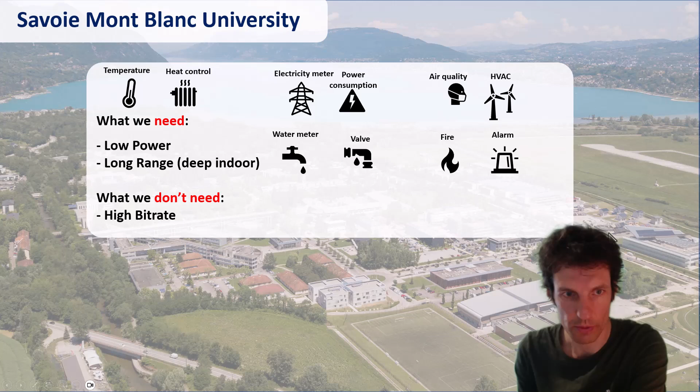And finally, there is one characteristic that you don't need at all, which is high bit rate, because you only send a few bytes every few minutes or so. And that is exactly what LPWAN is. LPWAN stands for low power wide area network. In this LPWAN category, there are 4 good protocols. They are not the only ones, but I'm going to mention only 4: 2 operated ones, LTE-M and NB-IoT, and 2 that work in the free band, which are LoRaWAN and Sigfox.

But don't get me wrong, I'm not here to say that LoRaWAN is the best, even if I'm going to speak about LoRaWAN today, because it only depends on the use case anyway. But what's nice with LoRaWAN is that you can build your own network, and you don't have to depend on anyone if you want to set up your private network. So if we want to do that, then we need to build a LoRaWAN network.

But before, we need to take action. Taking action can be summarized with this very obvious statement: we can control what we know. What does it mean? It means that the first action is to know. To know is actually putting sensors, like temperature sensors, air quality sensors, water sensors. And even by putting sensors, you can already save energy, because you can see all the aberrations and dysfunctions of a system.

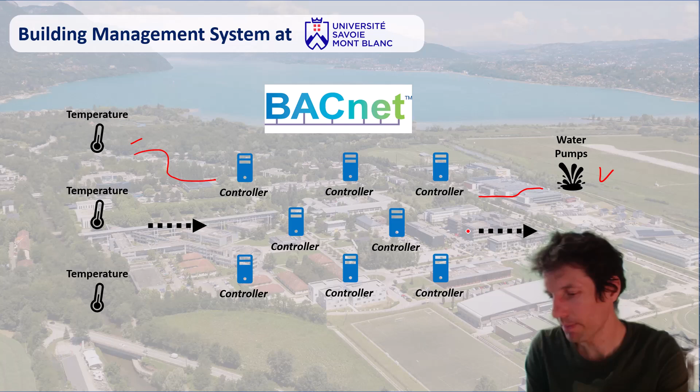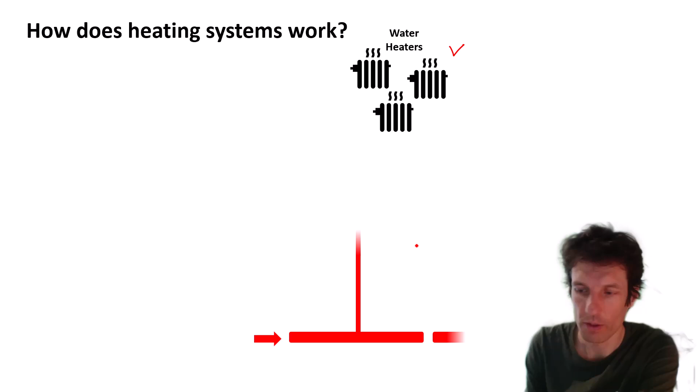And actually, if we want to improve this system, the first thing we have to do is to understand it very well, to see how we can improve it. So let's enter the technical room where all the pipes and the boiler are. At the university, we have hundreds of water heaters. How does it work? It's very easy. The hot water comes from the boiler, goes through the water heater, and the cold water goes back to the boiler. Very simple. And for the water to go through the water heater, we need a pump.

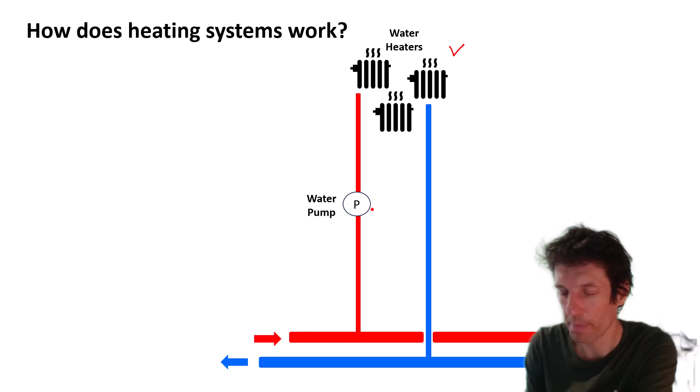And how can we control this pump? We can control it based on the outdoor temperature. So we buy a temperature sensor for outdoors. We buy 50 meters of cable. We break through walls, and we finally connect it to the BACnet controller. And the BACnet controller itself is also connected to the water pump. But for some reason, water pumps are not a very good element in the system to control the flow rate. So for that, we use another actuator, which is a three-way valve.

And on the figure, I will explain to you quickly how it works. It's very easy. If it's exactly how it's represented here, then it's completely open, meaning that all the water goes to the heater and comes back to the boiler. If it's open halfway, then half of the water goes back to the boiler and half turns around back to the heater. And finally, if it's completely closed, then all the water turns around and cools down by itself. The system is off.

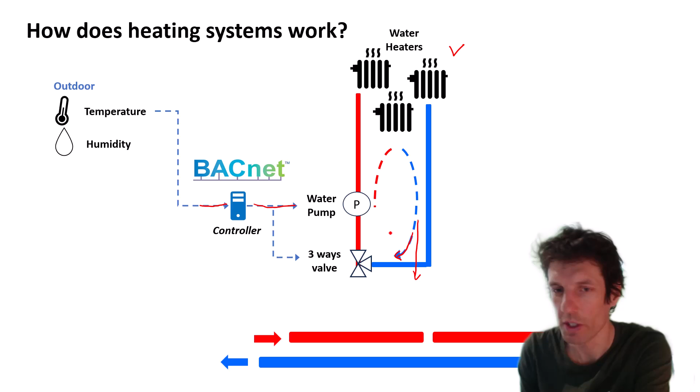Okay, but if you have such a system, there is absolutely no chance to reach the target temperature. Why is that? Because we have many buildings at the university, and they all have a different orientation. Some are oriented south, some are oriented north, some can see the sun, some don't. Some are very old, they have a very bad insulation system, and some are quite new and are much better in that way.

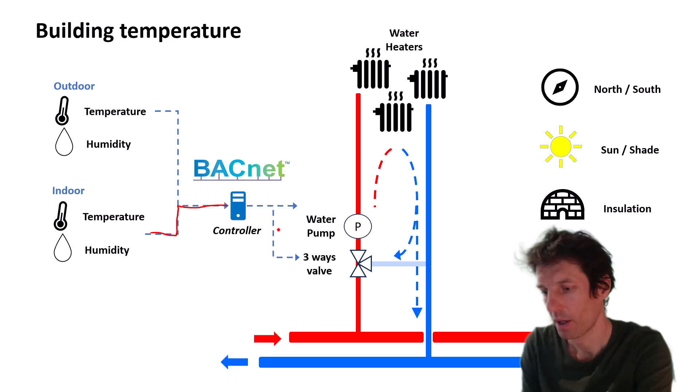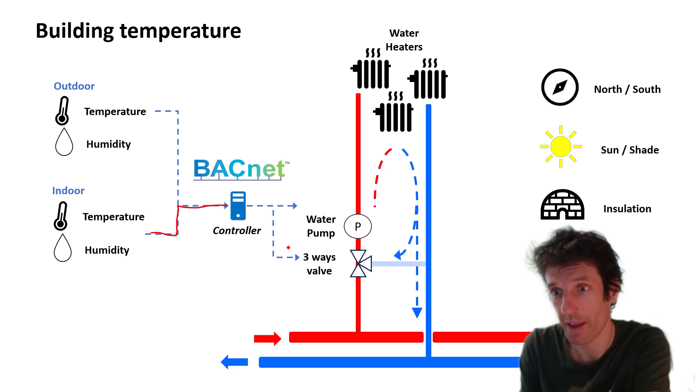So if you want to improve this first system, then you have to provide more data. So you go back to the shop and you buy, this time, indoor temperature sensors that you will put in every building. Of course, you don't forget to buy another 50 meters of cable each time, because you need to connect this indoor temperature sensor to the BACnet controller. Great. Actually, with this system, it's a little bit better, but for exactly the same reason, you have no chance either to get the target temperature.

Why? Because in the same building, there are many rooms, and some rooms are oriented north, some south, some can see the sun, some don't. There are rooms on the first floor, some on the last floor. And it also depends on the equipment of the room. For example, at the university, if you have 30 students with 30 PCs, you don't even need a heater in this room. You can believe me.

So what we actually need is a terminal adjustment system. In that case, it would be manual for the beginning of this explanation. And with that, you can control every room at the university.

If you imagine that among the thousands of students that are entering the room at the university, nobody touches the thermostatic valve, the knob. You imagine also that when a professor finishes his lecture, he will check that nobody is having a lecture after him, and if it's the case, he will turn off the heater before leaving during the evening.

And imagine now that every day that a professor has a lecture at the university, he comes 1 hour earlier to turn on the heater to be sure that his students will have 19 degrees as a target temperature to work. Then that could work, but it never happens.

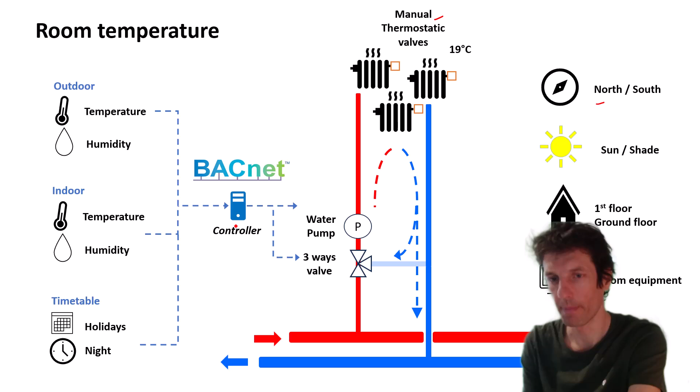We have a system with 2 times. Times for the day, starting at 5:30 in the morning, up to 7 p.m. The target temperature is 19 degrees, but as everyone complains, we usually put 20, even 21 degrees. And during the night, from 7 p.m., the heater stops, and the target temperature is 16 degrees.

That makes a heating time per day of 13.5 hours and a heating time per week of 67.5 hours. That could work very well if every room at the university from 8 o'clock to 7 p.m. were completely occupied. So I went on the timetable and I picked 1 week where the room occupancy is quite high. It's not always like this, believe me, you will see later.

But even with such high room occupancy, we can see that during this week, as an example, nobody finishes at 7 o'clock, but instead a little bit earlier. On Tuesday, Wednesday and Friday it's even earlier. And on Thursday, the lectures start at 10. That makes 9 hours where the heater was on for nobody, 6% of the time.

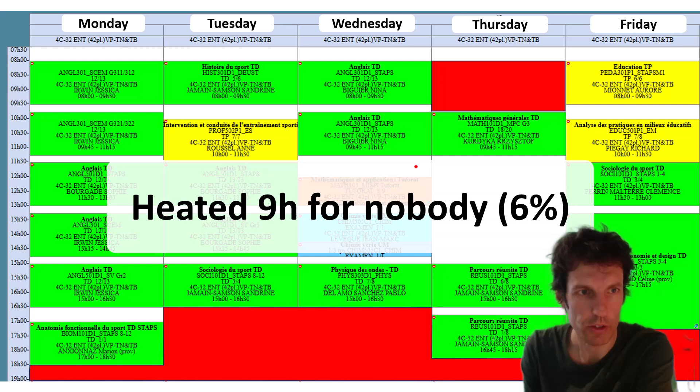So after this week, it was the examination week. And for the same room, look at the room occupancy. Wow, this time there are almost no lectures during the afternoon. On Friday it's very light. This represents 38 hours of heating the building for nothing, 56% of the time.

Then everyone went on holidays. It was the end of December. And at the beginning of January, everyone went back to the university for the beginning of term. And at the university, we have different lectures. We have lectures and we have hands-on. And we have rooms specific for hands-on. And at the beginning of term, they are not really well used.

The room occupancy of a hands-on room at the beginning of January was this one. That represents 61 hours of heating time for nobody, 92% of the time. So what I want to say here is that the previous system is quite good, but we have to improve it by putting a terminal equipment on each heater, but not a manual one, a connected one.

And how is it going to set up the set point? The set point will be provided by an algorithm which will get the temperature not from one room, but from many rooms, from all rooms actually.

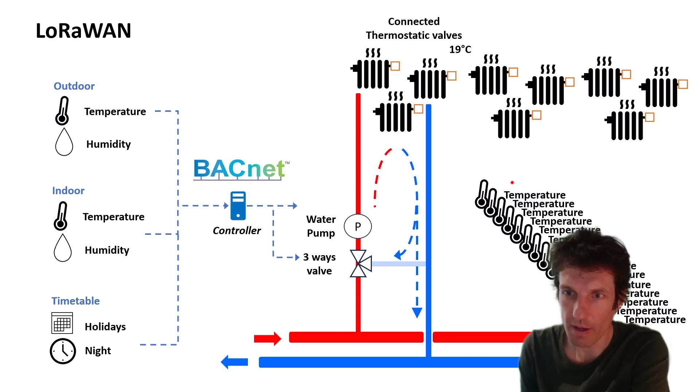For these thermostatic valves and for these temperature sensors, what do we need? We need something low power, because we don't want to charge this device every week or so. We want something which has long range capability. In smart buildings, I remind you that we speak about deep indoor capability. And finally, we don't need a high bit rate. And you remember that it's exactly what LoRaWAN is good at.

So LoRaWAN is going to work side by side with the BACnet protocol, providing more data to the controller so the controller can set up the right set point for every room at the university. But for that, we need to provide the timetable, and that's good because at the university we have the timetable for every room. So instead of putting a timetable with 2 times, the day and the night, we can provide every time slot for every room at the university.

And that's fantastic for BACnet because BACnet has a type of object called schedule object, which is exactly what is on this timetable.

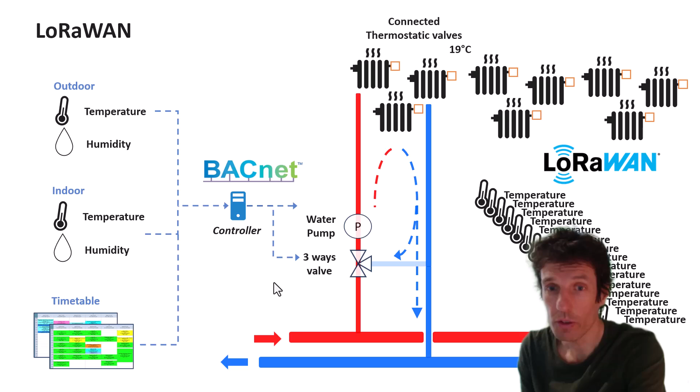So you've understood now that the challenge is to interface LoRaWAN and BACnet to take the best of each one. But the bad news is that LoRaWAN and BACnet have nothing to do with each other. They are completely different protocols. So if we want to interface them, what we need to do is to understand very well how they work. So we'll start with BACnet.

So each value is surrounded by other properties like the name and the unit. And we also have to give a type. So in that case it will be an analog value. And when we have many objects with the same type, we also have to give them a number. So in that case, 0 and 1.

And the BACnet controller can ask with a read service the values of the BACnet device. In this example, it will read the analog value with instance 0, and the BACnet device will answer with the value. That will be stored again in a BACnet object inside the controller. But the controller can also write a value, let's say 30 degrees, and this value will be written in the BACnet device, and the device will just answer OK. In that situation, the device is the BACnet server, and the BACnet controller is the BACnet client.